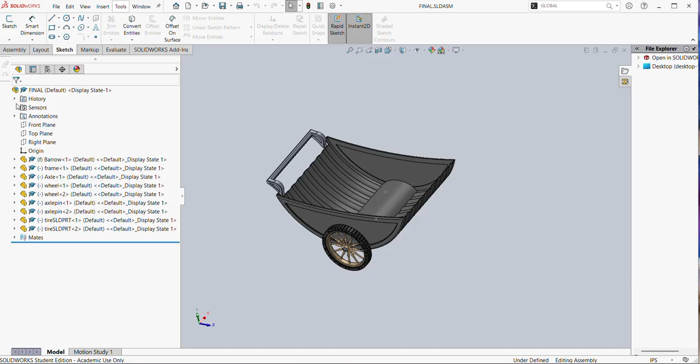Alright, hello. Here's my final project for Engineering 114. This is the wheelbarrow that I created. It is based off of an old one that my grandparents had. It was a challenge to make, and it's not done. I feel like I could keep working on it forever, but yeah, here it is.

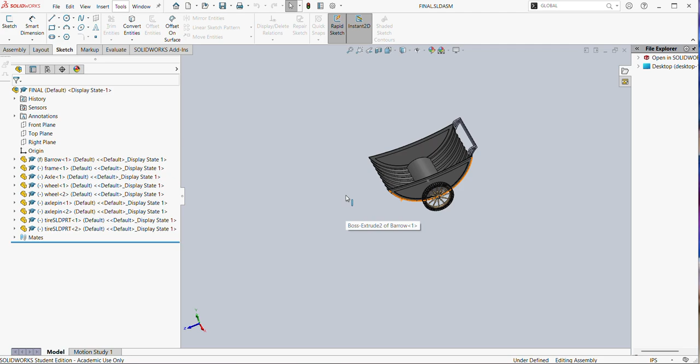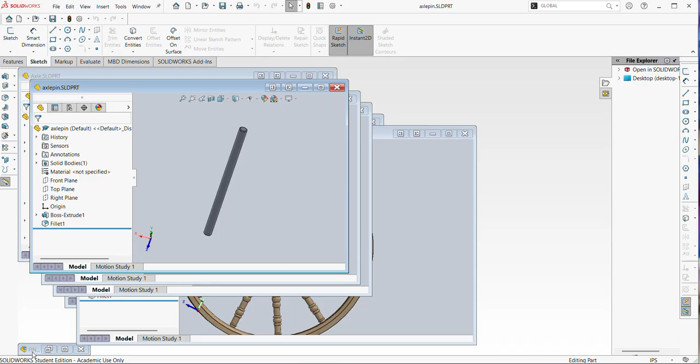Let's see, I guess I'll go over the individual parts here. All right. Because this is up here first, this is just a little axle pin. It is basically just what holds the wheel in place to the axle, just like right here. I just thought that would be a cool little touch. It's a pretty simple little part.

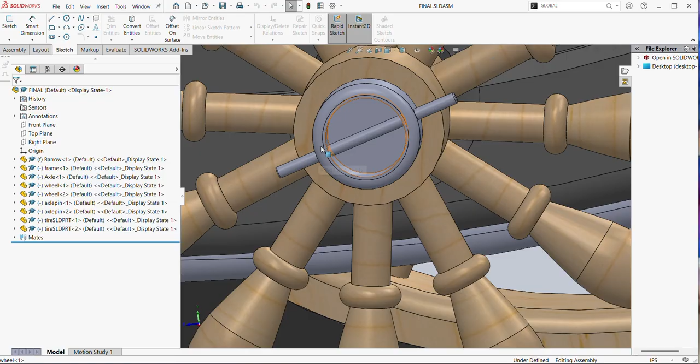When I assembled it, I have it offset, I believe, from the edge here, equal, and it seemed to work there to keep it centered. Let's see here. Yeah, the coolest part of it, I think, is the wheel.

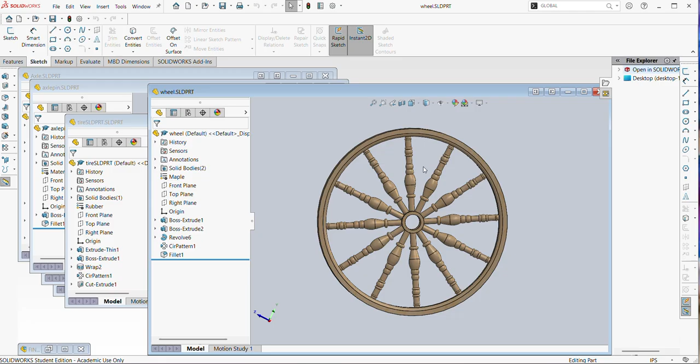Where I got the idea was from the vacuum nozzle, the little part of the nozzle handle that had the little bumps on it, and then it was revolved around to give it these, I don't know, features that you would make on a lathe, I guess. It's just, I think, a 12-inch wheel.

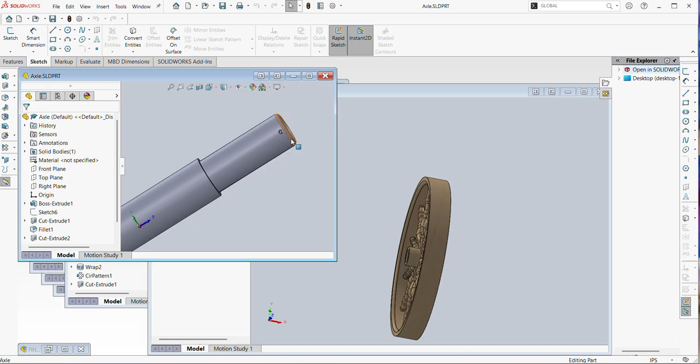I have the diameter here matching the axle here, with the width of this part being this wide right here, so that when I assemble it, it would mate up properly. I just drew a construction line here, a center line here, center line here, center line here, and then had this line go down and meet this line. Gave it some of the design texture here, and then revolved it around. I think it turned out pretty good.

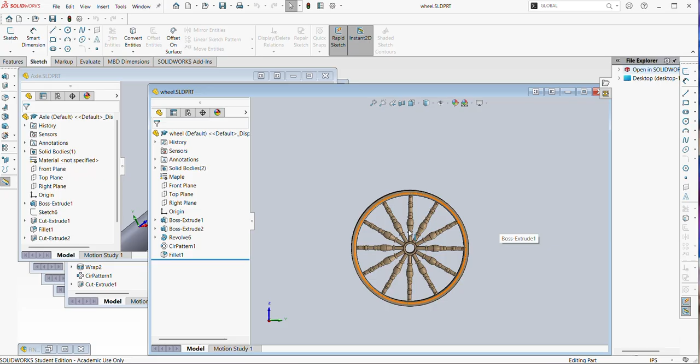In the drawing, it's kind of a mess, just because of all the little measurements, or the dimensions I had to create when I was creating it. So I tried to clean that up as much as possible, but it was a little dense in that regard.

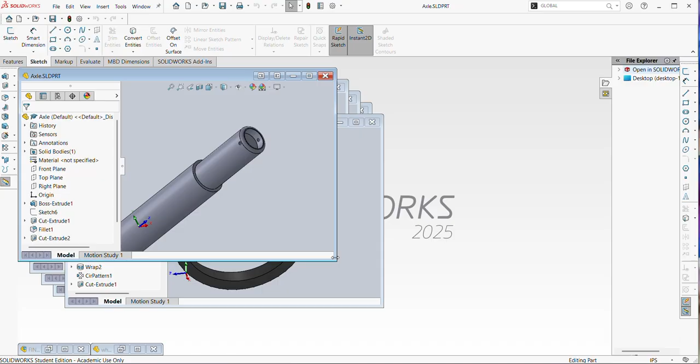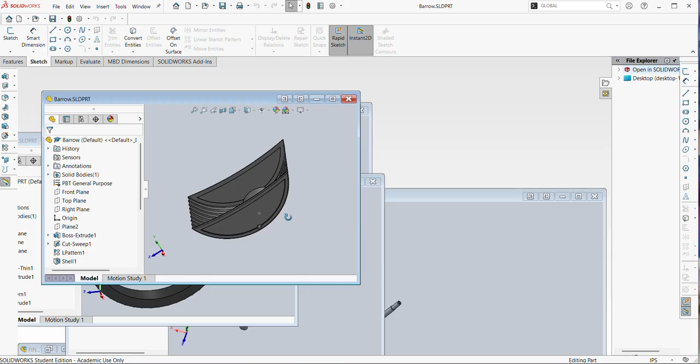Here's the axle. For pretty much the actual tray itself, this part, and the frame too, I'm kind of getting disorganized here. I just had a center line, and that gave me the best kind of symmetry control, instead of trying to create the whole thing outright. Found that worked pretty well. I had kind of issues initially. Well, a bunch of them.

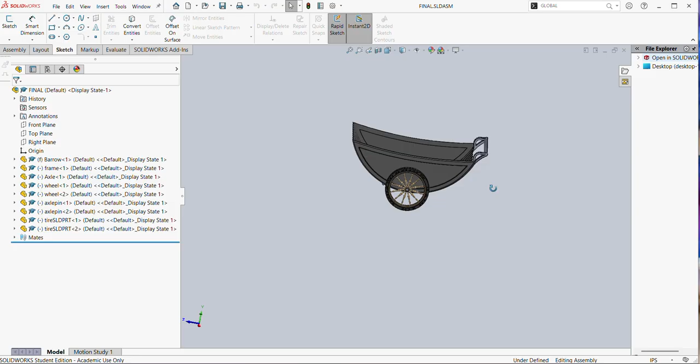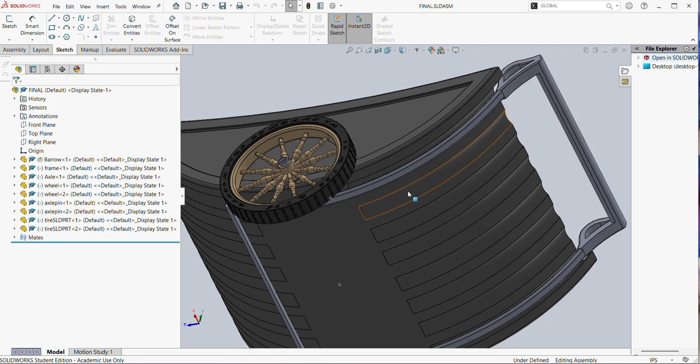One of them was having the frame mate up to the bottom of the tray here. When I initially created it, I used a sweep with the profile and the path, and there was no flat top for it to mount or mate to this underside here. I'm sure there's a way to do that, but I ended up just sweeping a square part and then filleting the edges, and that gave me the surface to be able to mate to the bottom side of the wheelbarrow.

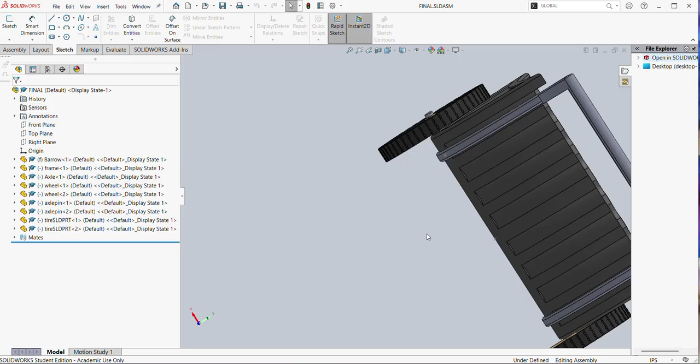And then also this gap right here, I had to make some adjustments for that, making the axle a little bit longer, and adjusting the depth of this extrude cut on the axle.

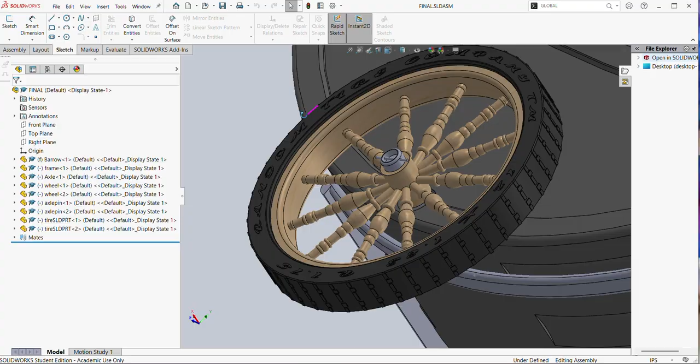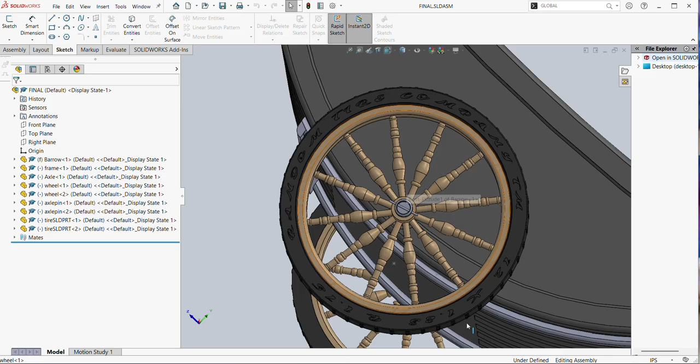What else here? The tires. Tires turned out pretty cool. I just wrapped this little design that I made around the outside of the tire, and then, as you can see, put some words on there. It says like random tire company, and then has, I think, the dimensions of the tire on it. And then the tray itself has this corrugated look. I thought it looked kind of cool.

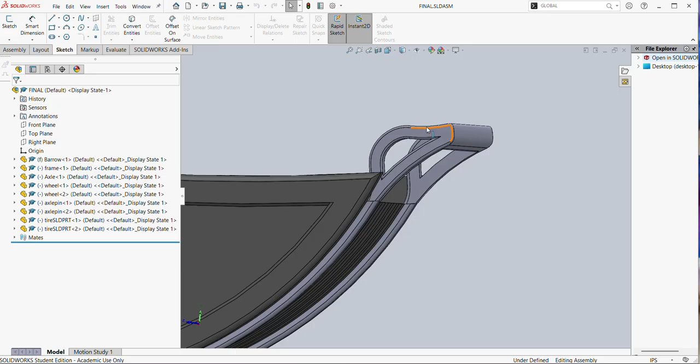The handles here, I used a spline on. That too in the drawing resulted in a lot of dimensioning. So it's a little messy, but you'll probably see that in the drawing itself.

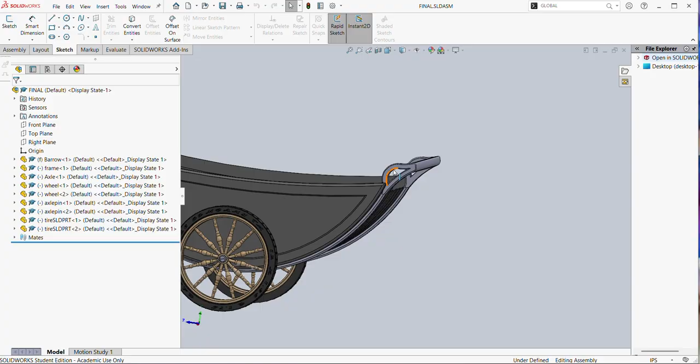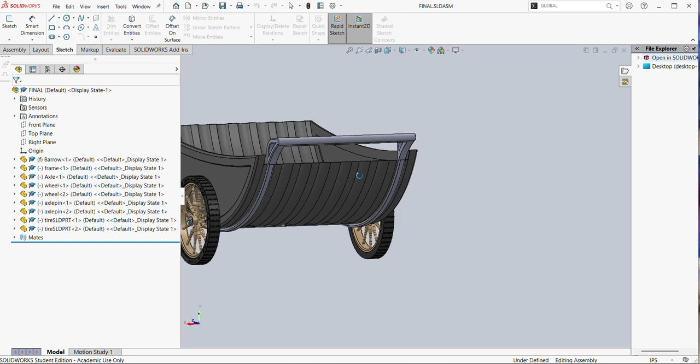When I was creating the parts, I created construction lines here, vertical, horizontal, vertical, to reference both the tray and the frame and handles off of, which worked well for most of it. I was having some issues making this taller while keeping it matched to the right length for some reason. So I ended up just cutting a little bit out, which is a little cheesy, but did an extrude cut across the tray.

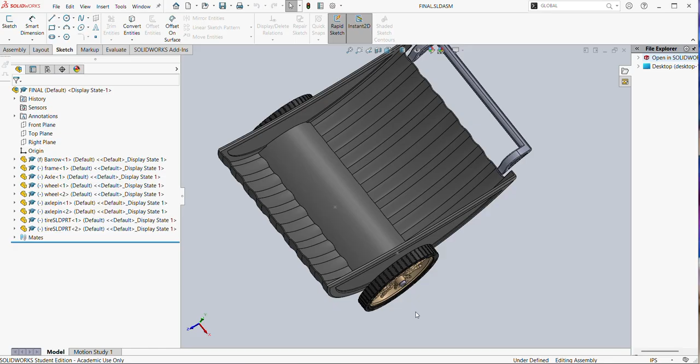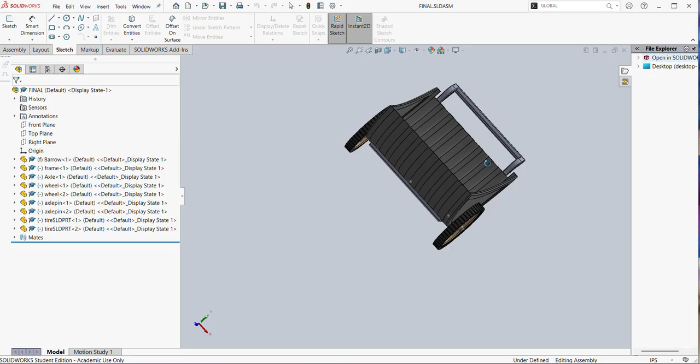Let's see what else. I was trying to figure out how to create a geometric relation. I know a way exists, between the axle, the hole in the wheel, and the hole across the tray, so that if one changed, they would all change. But I did not have a chance to figure that out before I ran out of time. I don't know what else I could say about it.

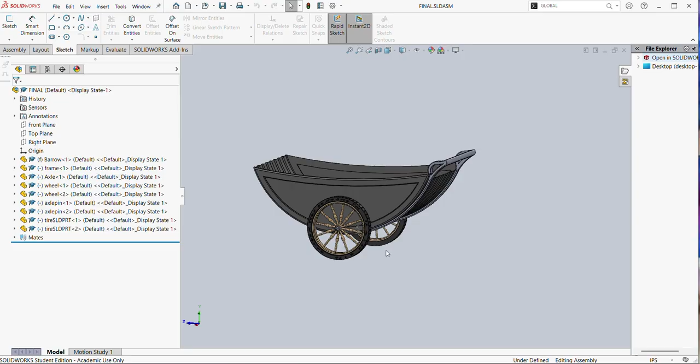I felt like it was overall pretty challenging for me. Relatively speaking, I think I did a good job. Spent probably 35-plus hours on it, a long time, and went through several iterations of each part. But overall it turned out good, I think.